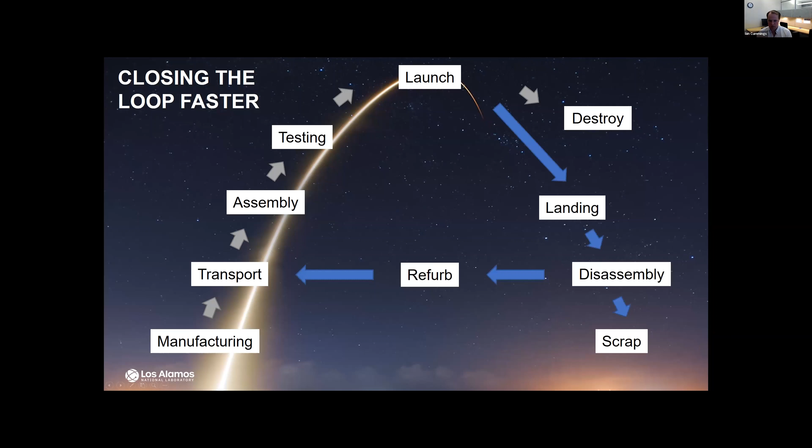If we think about the traditional aerospace launch paradigm, it has been to build your rocket, transport it in parts to the launch site, assemble it, test it, launch your rocket, and then anything that's not intended to stay in orbit gets destroyed or remains in orbit. But the new reusable launch vehicle paradigm has closed that loop by landing or recovering components from the launch vehicle, disassembling them, refurbishing them, and then cycling back through that launch loop. The problem is that there are many opportunities for damage in this whole cycle, which means that there are many areas where you might need to actually inspect the rocket or components of that rocket before you use it again.

And the whole business case that makes these reusable rockets financially viable is based on the ability to close this loop quickly. So to this point, the fastest launch-to-launch closed loop that SpaceX has been able to achieve is 27.2 days, but they'd really like to be able to do it in 24 hours. And we believe that inspection is going to be a large component in that loop closure time. And so for that reason, we think the aerospace industry really needs faster ultrasonic NDT techniques.

If we consider some of the existing competitors or existing solutions, you have something like this ultrasonic testing crawler, which is a small robot that can be driven along a surface or crawl along a surface and inspect a small area with a contact ultrasonic probe, or perhaps a phased array probe. These solutions are typically too slow. They're really only applicable to simple structures, and they require a lot of manual input and control from an NDT technician.

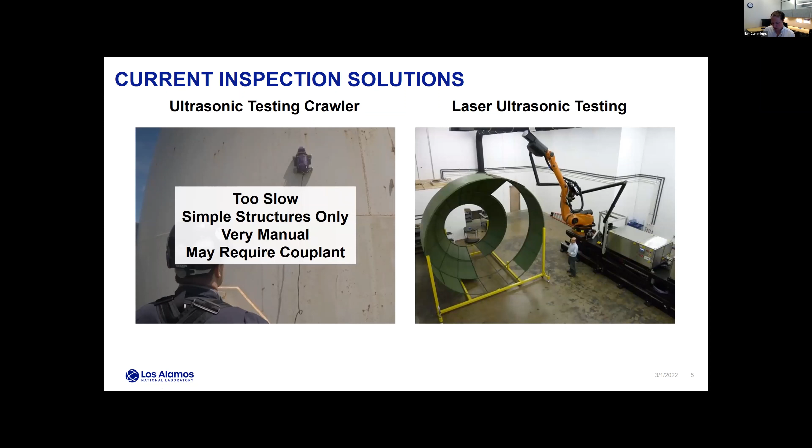On the other hand, you have a more advanced solution like laser ultrasonic testing, which excites a structure with a high-powered laser and measures the response with a low-powered laser and repeats that point by point as it scans across the surface. The problem is that these solutions, though faster than ultrasonic testing crawlers, are still too slow for the aerospace market, and they're very expensive. A single system can cost on the order of several million dollars. They're also very sensitive to the surface finish of the test article in terms of their signal-to-noise ratio, and they're not very portable, which means they're not well suited to agile launch environments.

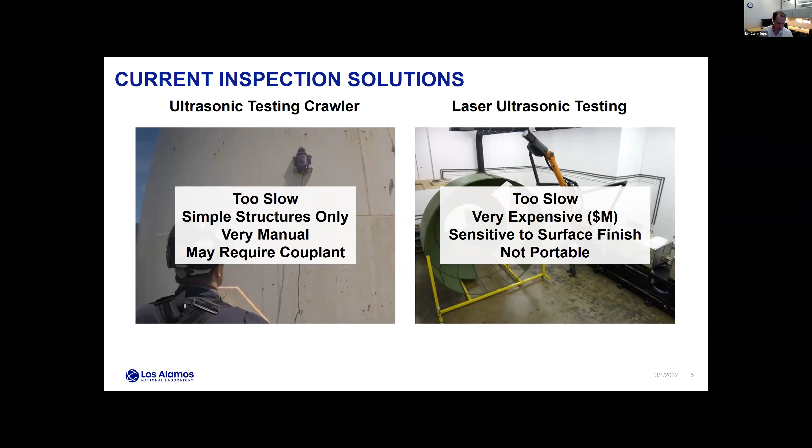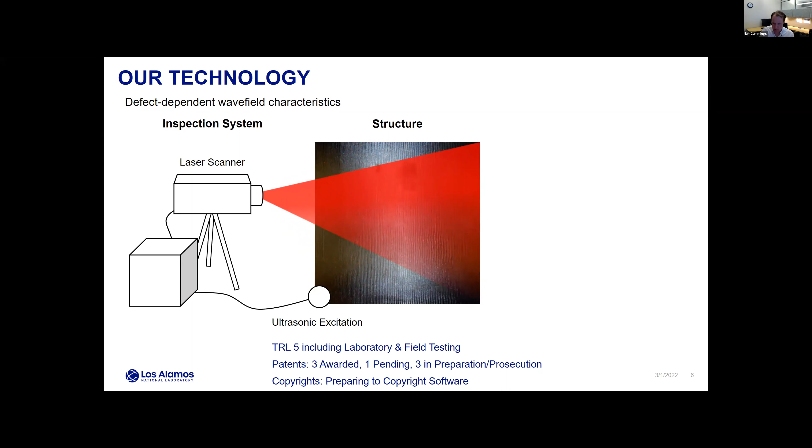We believe that the Assess technology is a strong answer to many of these problems. We inspect structures by exciting them with an ultrasonic transducer or several transducers attached to the structure with a single ultrasonic tone and scanning a laser Doppler vibrometer across the surface of that structure. This is a low-powered laser, and it allows us to capture a wave field image of how the waves propagate through the structure and interact with potential defects.

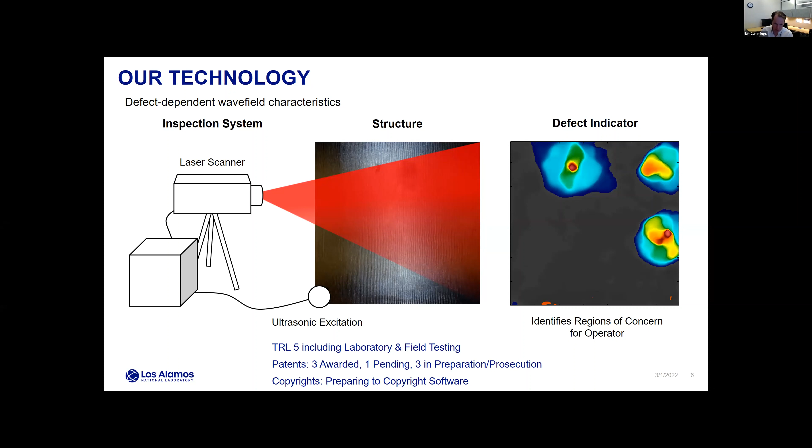Taking that wave field image, we can do some additional processing to generate detections or regions of concern for a potential NDT inspector. Our technology is relatively mature at a TRL of 5 for many applications, where we've done a great deal of laboratory and some field testing. We've been awarded several patents and have several more in the pipe, and we have several copyrights on our software and are planning on copyrighting some of our latest developments in the near future.

Our vision for the ASSESS technology is to make launch cadences faster via rapid, large area inspection. Our system is 1 to 2 orders of magnitude faster than competing ultrasonic inspection solutions. We can scan much bigger regions because we're only using a low power laser, and that also means our system is inherently eye safe.

With laser ultrasonic testing solutions, you would have to build interlocked scanning areas and use PPE. That's not required with our solution.

We're also capable of scanning real 3D structures and doing analysis over those structures, and we're working on advancing that part of our capability. In the past, we've demonstrated that our solution can inspect composites, metals, and additively manufactured parts, and all of these materials are common on the launch vehicles that we see today.

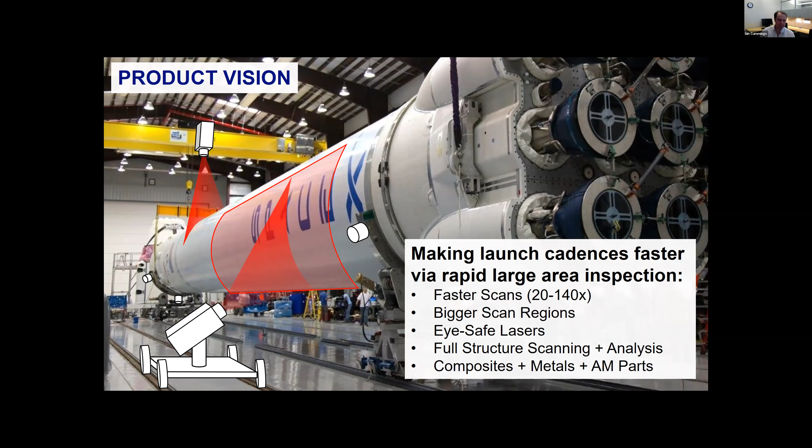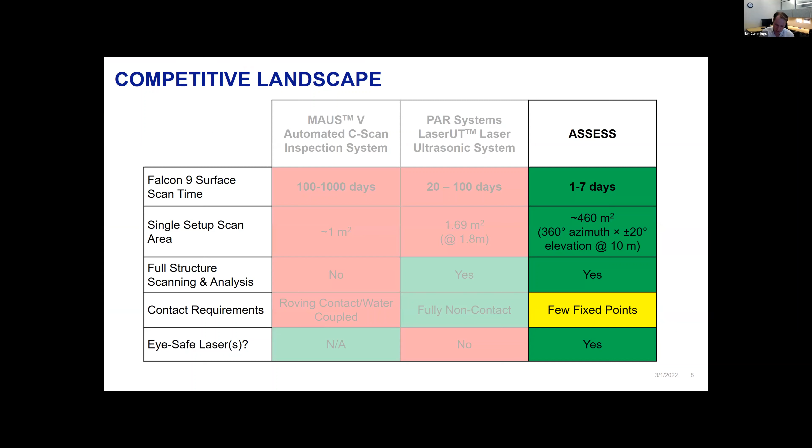If we take a quick look at the competitive landscape for our technology: the MAUS V system, the automated C-scan inspection system, and the PAR systems laser ultrasonic testing system. The big key point here is that our system is much, much faster than these competitors, and that's really the driving factor in adoptability in the reusable launch vehicle market.

If we think about the markets we want to approach with our technology and where we might have a good fit, we believe the space launch industry is our beachhead market. We believe that because they have a need for the technology today, and they have the regulatory freedom to pursue new inspection solutions immediately.

From there, we think we could break into the government aerospace market, working with folks, some of you who might be on the call in the Air Force, the Space Force, and NASA. From there, we believe the biggest eventual market for our technology would be commercial airlines.

If you think about it, every airplane that flies is itself a reusable launch vehicle, just not in the same sense as a rocket. The problem with this market is that there's a large regulatory barrier to entry, so your technology and your business model have to be very mature to be able to overcome that regulatory barrier.

So how do we get technology into the hands of our first customers? Well, we here at the laboratory are good at developing this technology, but we need to partner with a commercialization firm, someone experienced at taking ultrasonic technologies and driving them to market. We would license our technology and analysis techniques to them, and then work with them to sell hardware, software systems, and scanning as a service to our initial space launch customers.

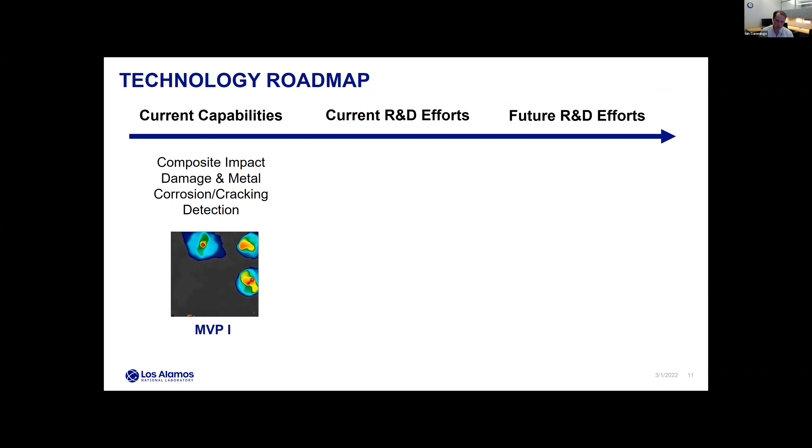So where's our technology at and where are we going? Well, for several years, we've been able to detect composite impact damage, hidden metal corrosion, and even cracking in metals, and we consider that our first minimum viable product. Currently, we're working on developing and improving our automated structure extraction and analysis techniques, and we consider that MVP number 2.

We're also working on in situ as-built detection and analysis for additively manufactured parts as they're being built. And we have a development effort for detecting the kinds of defects in COPVs that caused the failure of that Falcon 9 rocket in 2016.

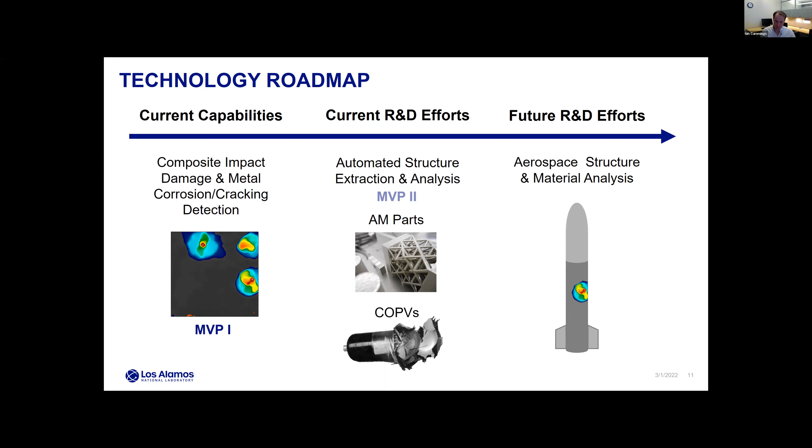As we move forward, we hope to integrate these technologies and techniques to allow us to inspect aerospace structures and materials, and that's really the next step for us. What we're looking for is a partnership with an aerospace launch firm that would allow us to get hands-on with their structures so that we could increase the readiness of our technology to scan these kinds of systems, detect the kinds of defects they're interested in, and address the materials and structures that they're concerned about.

And with that, I'd like to thank you for your time. My name is Ian Cummings, and I'm excited to answer your questions.